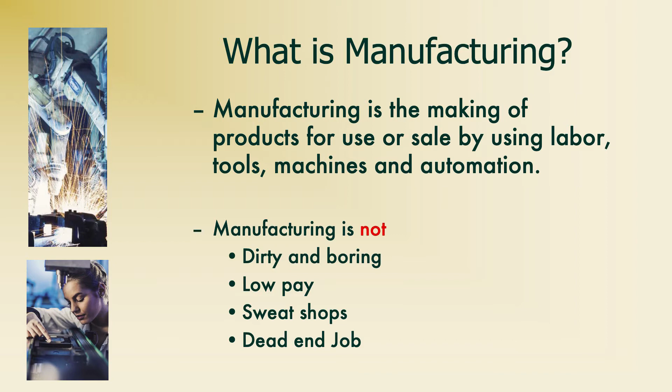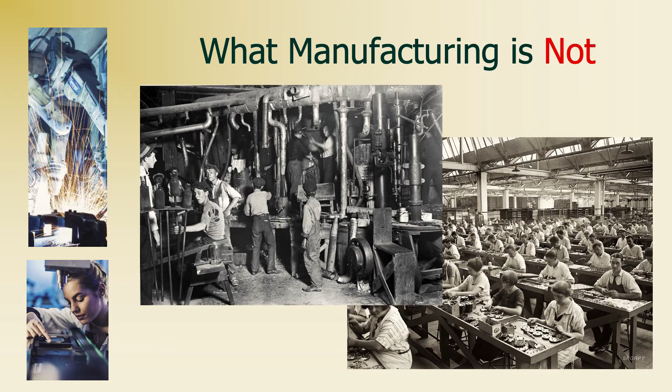In this program, you will touch every single one of those items.

You'll get a chance to hands-on use it, and once you've used it, you'll make a decision on what you want to do for the rest of your life, at which point you go through and decide on what you're going to do, and you'll have jobs waiting for you.

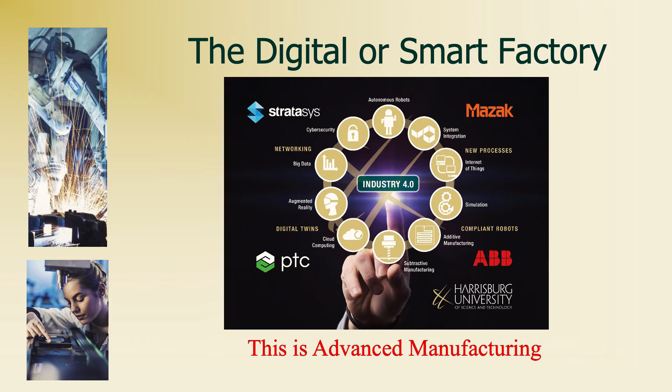Now, most people say, 'Hey, how can I work with this stuff? It's complex.' Well, it's kind of like eating an elephant. You don't shove the whole thing in your mouth at one time. What you do is you go through and you take a spoon and you eat little pieces of it. So what we do to teach you technology, we teach you little pieces of it, and you add them together, and as you add them together, you finally get the full picture.

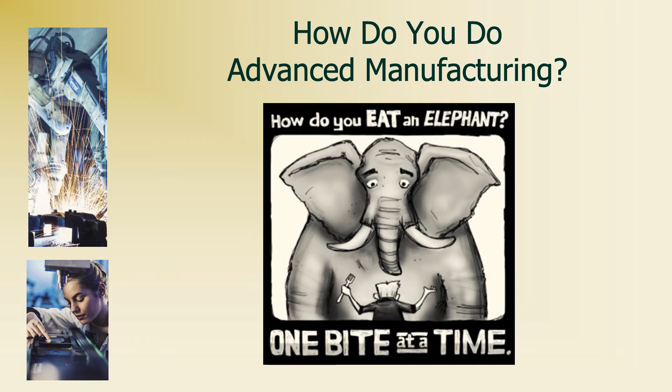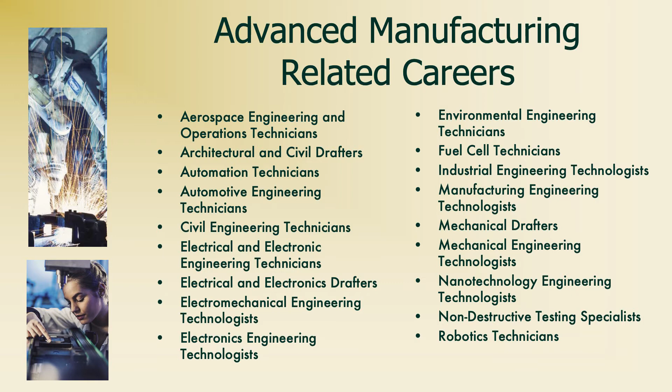The real shortage that I just mentioned earlier, by 2025, there's 2.5 million jobs available. And those jobs include many different titles. Some of them have engineering after them. Most of them have technologists after it. When you leave the program, you'll be a technologist. You'll understand the technology behind the processes.

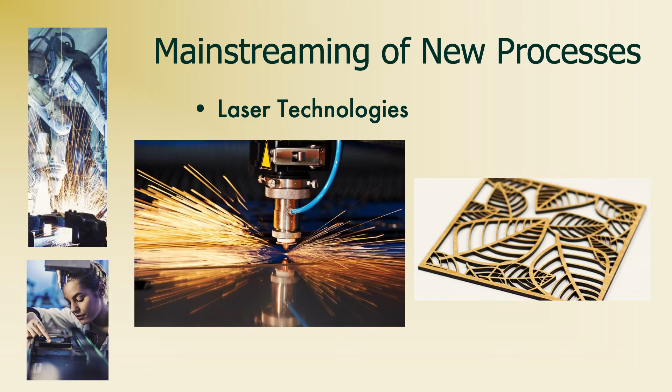Some of these new processes coming to the university include laser technologies. We're having a laser cutter come in that's capable of cutting up to a 1/2-inch thick piece of steel. We'll also have what's called a water jet. The water jet is a device that forces water through metal and cuts it clean.

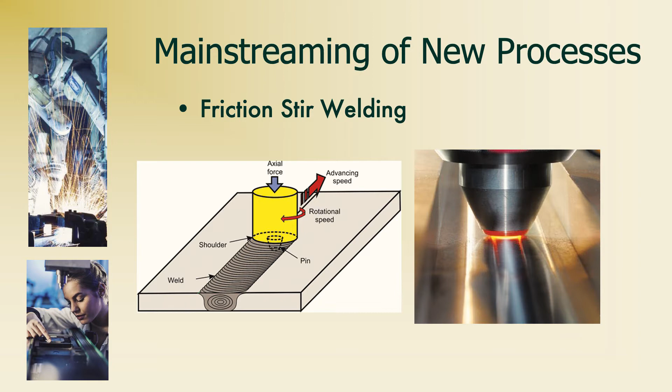With additive manufacturing, it is exploding. It is a new area. There are several manufacturers in Ohio that have gone through and pulled their whole production lines out of old factories, and they're putting in large printers large enough to print cars.

But you're going to say, I really don't want a plastic car. Well, that's okay, because with printers that will do steel, you can now actually print a body for a car or frame for a car out of the metal. And by the way, we are picking up a 3D stainless steel printer from Stratasys in the next 2 months.

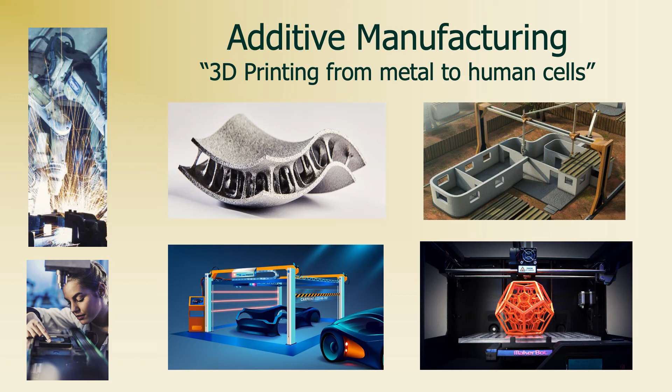The next part of the process is integrating these systems, putting them all together. And if you look at the Shrek movie, and Donkey's talking to Shrek, and they're talking about onions having layers, and ogres have layers, the reason that is there is because all this technology is based on layers. You do one layer at a time, and you move to the next layer.

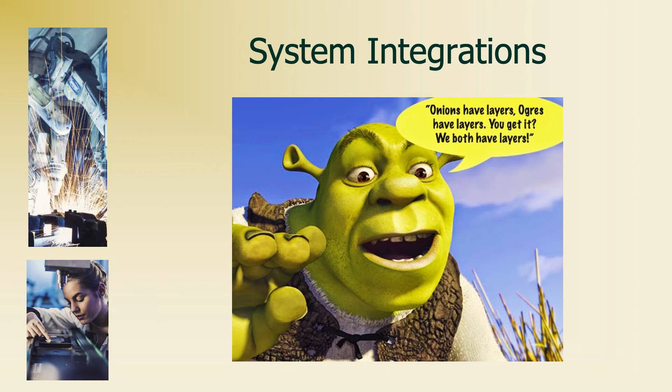That's how we work. Now, with system integrations, that's the part of putting together robots, automation, and whatever it might be in the production line. That looks complex when you look at the pictures, but it really isn't complex as long as you do it one piece at a time.

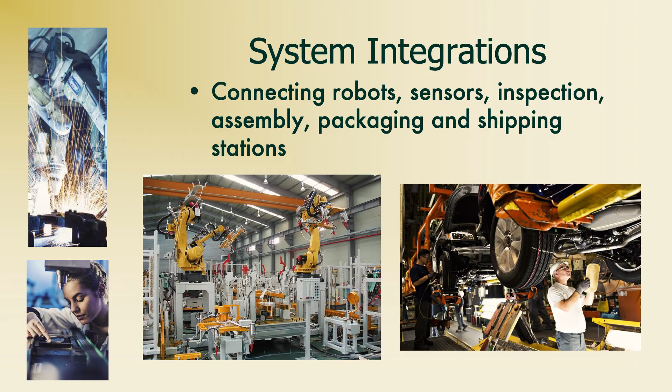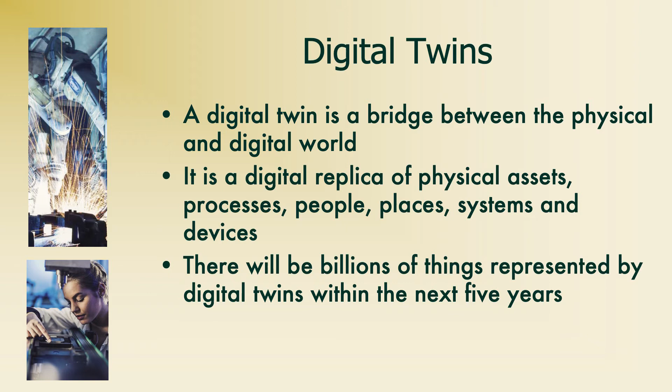The next phase that you move into is called digital twins. This is new. This is where you build something in the CAD software, you collect data through IoT, and you put it into the system, and it tells you if the part's going to fail or not. If the part fails, then they take that data and they do a simulation to figure out how to fix the part. Once that part is fixed, then they go back to whatever was broken and replace it. And the picture you're looking at, it's a robot that was told he had a screw loose.

That screw being loose, he's trying to fix it himself based on the information coming out of the monitor. This is the same thing they're doing for cars.

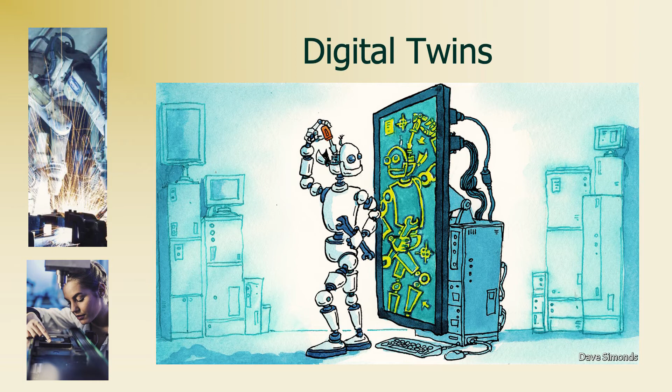It's being done today. Now, digital twins—a good example is a bicycle. The bicycle was built in PTC software, in the CAD software. They use IoT to collect the data points off of it. Once they collect the data points, it goes into the system and is put back out through Vuforia. That software is used to view the data. It'll tell you what the sensors are doing, give you the history on the sensors, and provide the information needed even for a service technician.

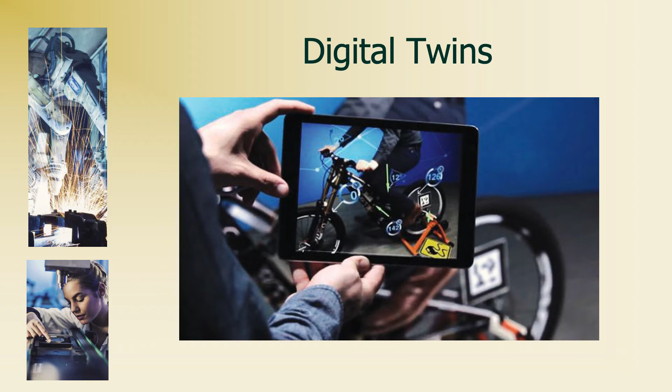Simulations are going strong. We will simulate anything from parts to work cells to machine tools to factories. The machine tool simulation has been around for quite a while.

In fact, I took simulation to Johnson Space Center and started them with it. They were cutting the bulkhead for the X-38 while I was down there—one of the projects we worked on. It was a lifeboat for the space station, and they were down to the last 4 hours of cutting after cutting on this piece of aluminum for 4 days, and there was a piece of bad code in it.

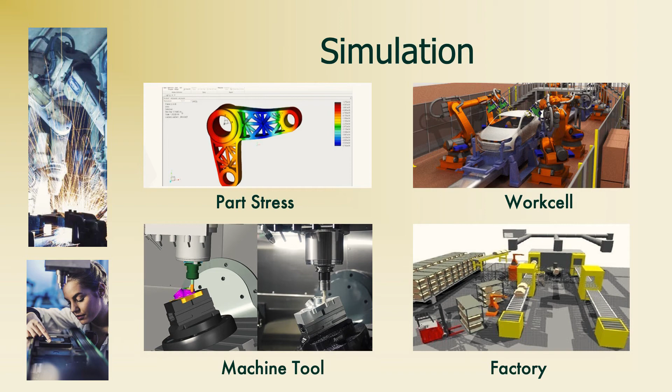The cutter went off to the side and cut right through the material, and they lost that hunk of material. Because of that, I brought the simulation in and was able to show them that they could have simulated it ahead of time and missed that human error. Unfortunately, they didn't miss it, and they lost the piece. It cost them about $250,000 in seconds.

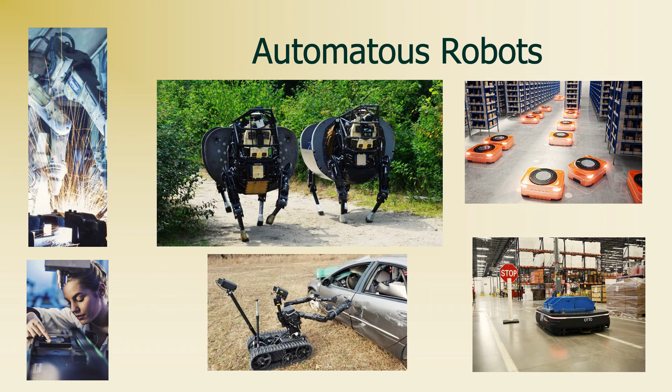We also have compliant robots. These are the robots you can work with that aren't going to hurt you. You can work with them side by side. If they get in your way, you can shove them out of the way. When you're done working, they'll go back to doing what they're doing.

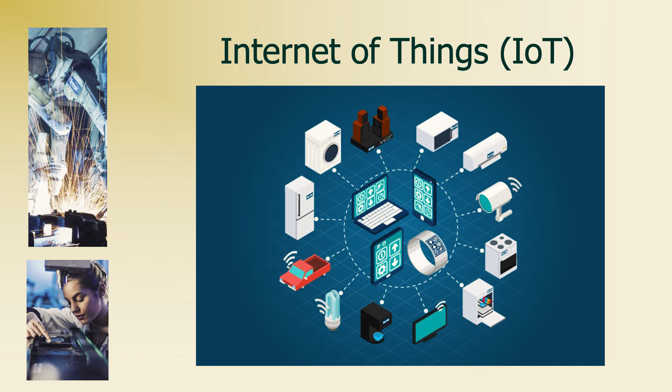IoT—I've mentioned it a couple times—Internet of Things. Anything that you touch that's plugged into a wall, your phone, your car, your washer and dryer, your furnace—they all send information back to the manufacturer. This information is used to better products and also see how they're being used.

Now, IoT is so important that somebody with an international company can think there's something wrong with the production line, and from a remote office they can drill down into the different companies, find the company they need, find the production line they need, and then find out what's wrong with that production line. At that point, it's somebody like you who's going to go in and figure out what's wrong with the production line, offer up a solution, and then build it out.

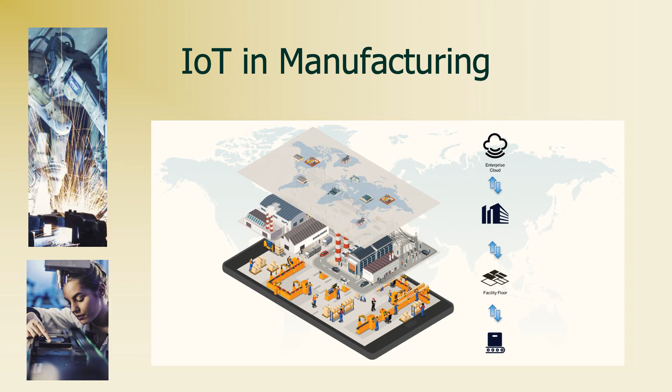That's where you're headed. In augmented reality, there's a difference between augmented reality and virtual reality. With augmented reality, you have the ability to project your CAD data or written data onto a screen and onto the object where somebody's working. In virtual reality, you're actually physically manipulating the part. There is a difference, but we deal with both of them in our program.

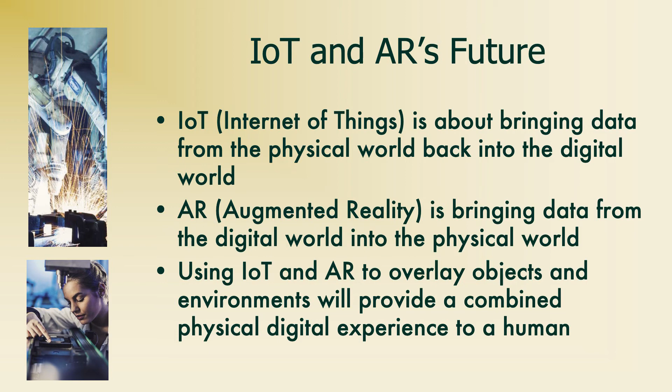We talk about cloud-based technology. A lot of cloud-based technology is based around design and also tracking of parts. You know that when you order something from Amazon, you end up getting 50 million emails—it's been purchased, it's been moved, it's been shipped, it's on its way. That is what the cloud has done for you, and it's done a lot for manufacturing. We can now trace something from the beginning of manufacturing all the way through to delivery to the person.

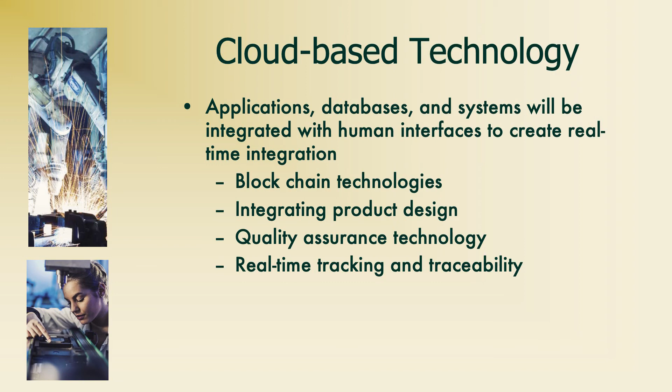Now, our program is much different from most of the programs at Harrisburg University. Most programs bring you in the top side of a funnel and point you into one major, one particular thing you're going to do.

Our major isn't like that. You come in the little end of the funnel, and we put you out into our program where you get to look at all those different pieces and work with them. When you're done, you'll have a chance to decide what you're going to do for the rest of your life, or at least for now. And once you've done that, you'll find there are jobs waiting for you. In fact, right now there are 60 local jobs and 160 national jobs waiting for students.

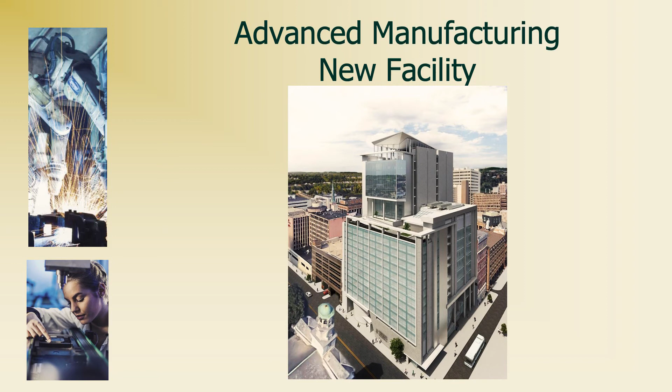Now we're moving into a new facility. The university is investing $40 million into the first 3 floors of this new 17-story building in downtown Harrisburg. Of that, my program will have 13,000 square feet. We'll service about 260 students with 5 full-time faculty and 6 or 8 different part-time faculty.

This is quite an investment. It includes about $1.6 million worth of already donated tools and materials, and about $8.9 million worth of new equipment, or as I call them, toys.

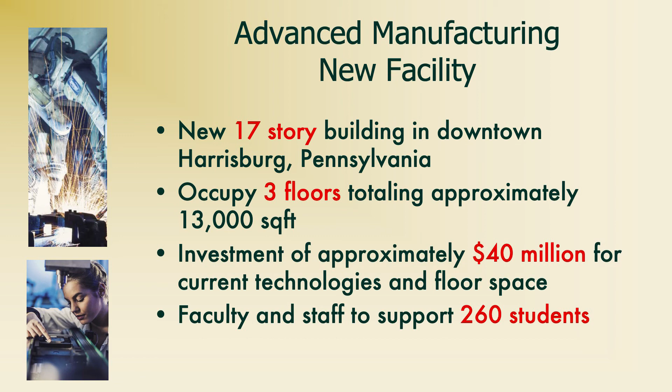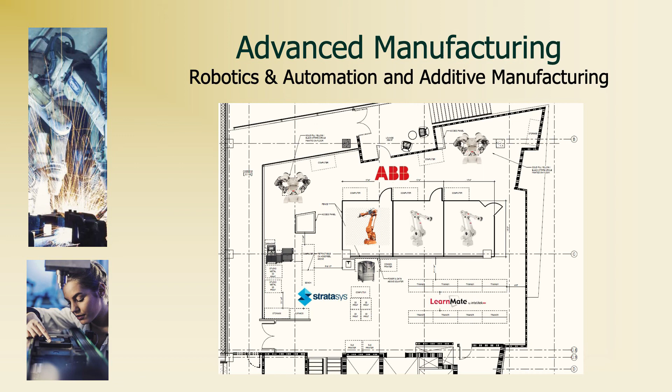We have an advanced manufacturing, robotics and automation area, and an additive manufacturing area. That area will hold the robots, automation, pneumatics, hydraulics. It'll also include additive manufacturing, which is 3D printing.

You also have a non-metallic material processing area where we process woods, plastics, fibers, and things like that. Along with this lab, there's a testing area. You will make things to be broken, and you will break them. You won't take them home.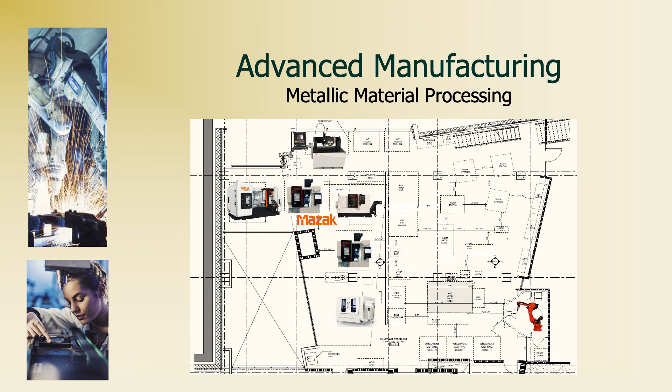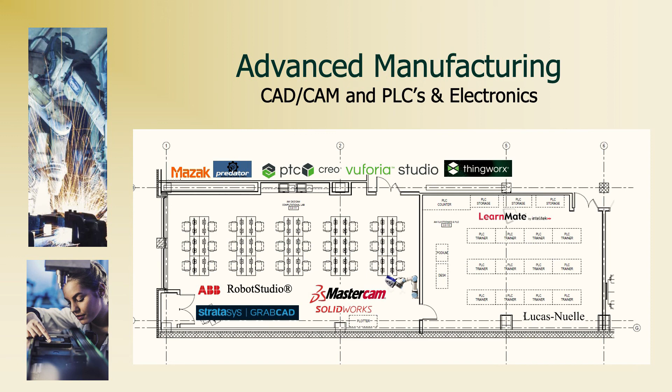There will be a CAD CAM area where you use CAD software. You'll be digitizing items to bring into the CAD software and create a point cloud. You also have an electronics and PLC area, as well as a CIM area and an FMS area.

That particular area has 12 stations. Each student works around each of the 12 stations, figuring out how to use each robot and piece of machinery, which includes a mill, a lathe, a laser, and an automatic storage and retrieval system.

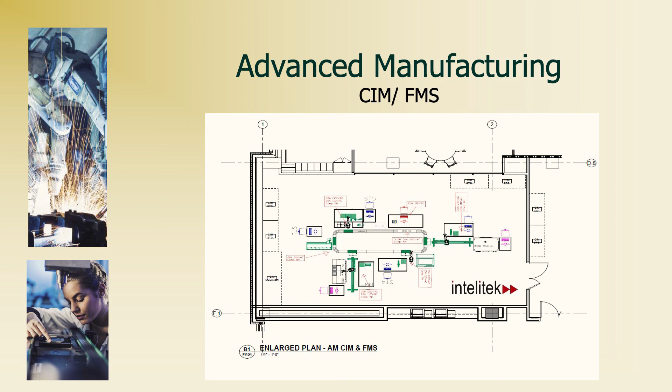Towards the end of the semester, you pick a project, turn on the system, leave through the doors, and shut off the light. That's called lights-out manufacturing. You come back in 4 hours. If the project is done and has completed its task, because you set it up that way, you get an A. If not, you work on it again until it's right, and it can be done. The last area I want to talk about is our nanofabrication area.

Not only will you be able to build things you can see and hold in your hands, but you'll also be able to build things so small it takes a microscope to see them. This facility includes a small learning area and a room where you put on your bunny suit, as I call it, before entering the clean room. We already have 4 programs at the university interested in using this facility, and companies have been calling looking to rent time.

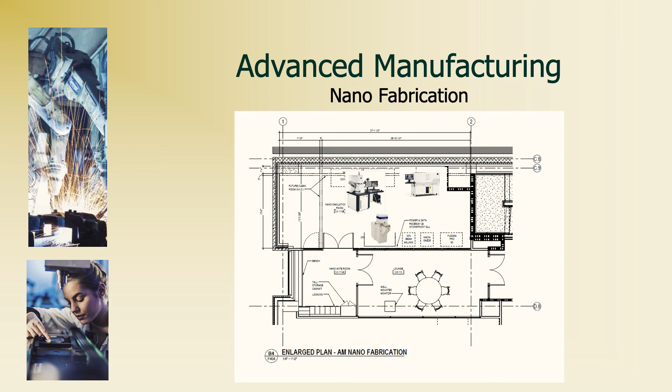The Friends of Manufacturing are people who have already signed up to support the program. From these people, we've already received $1.6 million worth of donations. These are all people looking for employees — they are looking for you.

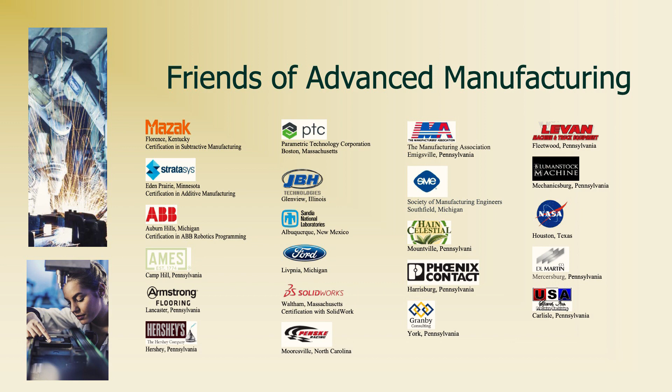So remember, advanced manufacturing isn't really hard. You've got to eat that elephant one spoon at a time, and you've got to do it in layers.